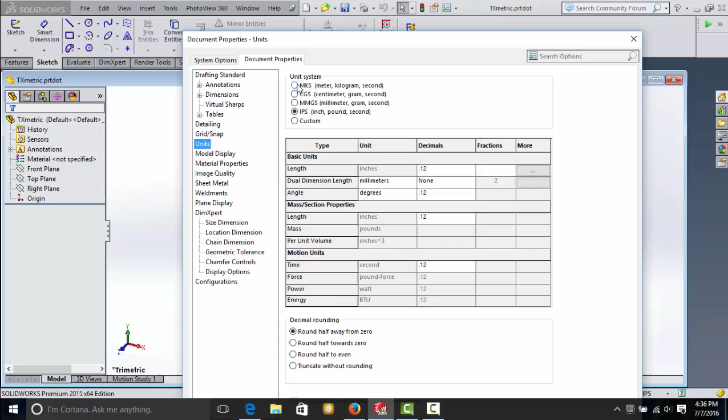Now what we want is a meter/kilogram/second unit system. Go ahead, click that, and hit OK. This metric part template can be used if you want to create metric parts. We're primarily going to be working with English units, so you won't have to use it much.

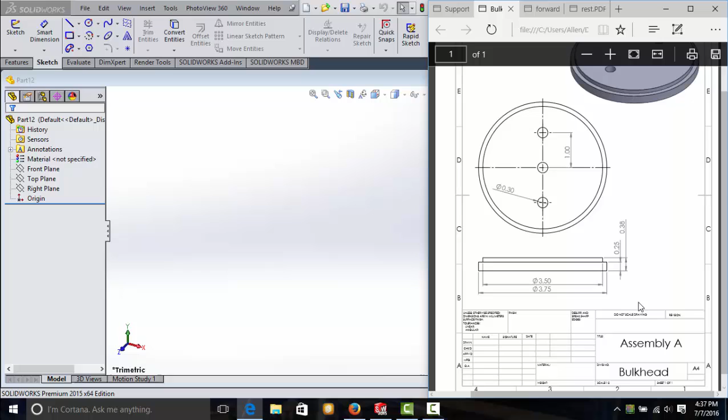Now let's go ahead and open up a new part. To create this part, you're going to be working from a drawing. We'll learn how to create drawings later, but for right now we're just going to be looking at this one. For this bulkhead, part of Assembly A, you can see the different views of the model and look at the dimensions we need to create. Go ahead and open up that part drawing so you can work from it on your end.

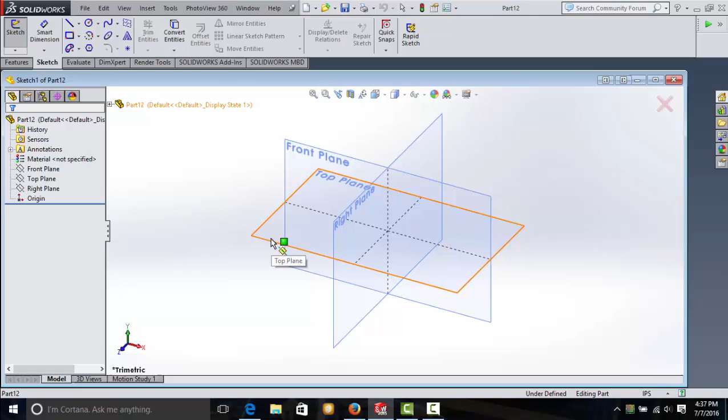First, I'm going to go to the Sketch tab here and select Circle. I'm going to be working from the top plane. Draw the circle, and then use our handy Smart Dimension tool to give it the proper dimension, which in this case is 3.75 inches. There we go.

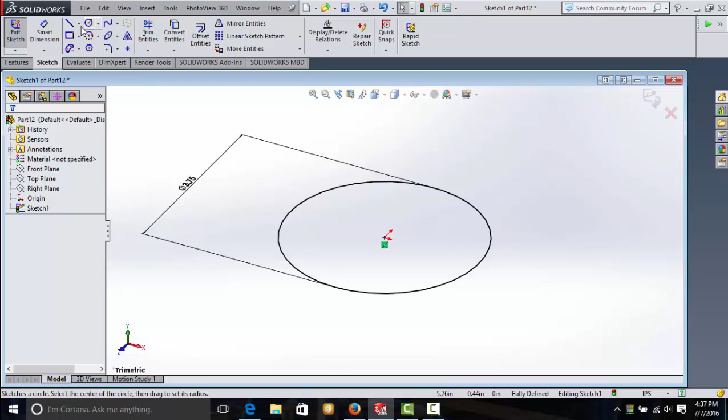Now I want to add a couple more things to this. We have 3 holes there. One of them is in the very center of the circle. That is 0.3 inches in diameter.

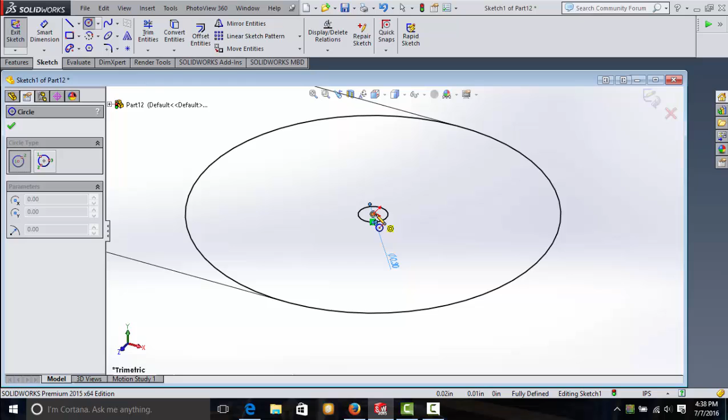Now there are 2 more holes in a direct line from that center. If you look carefully, you'll see that if you drag your circle pointer around, a dashed line appears to show you that you are directly horizontal on the same line as that original circle. If you go up here vertically, another one pops up. This is an important reference tool that can be very handy when it comes to drawing new sketches.

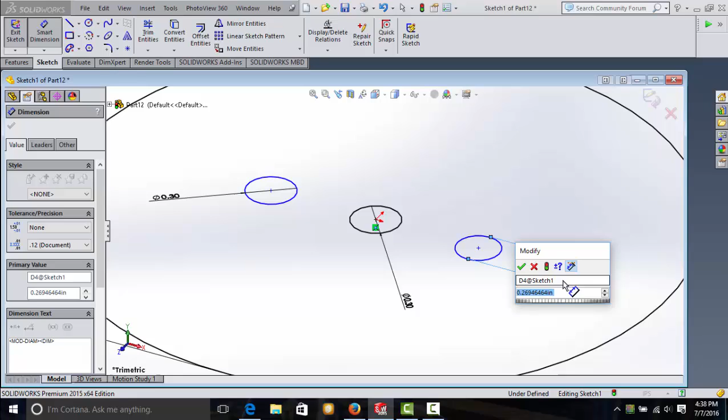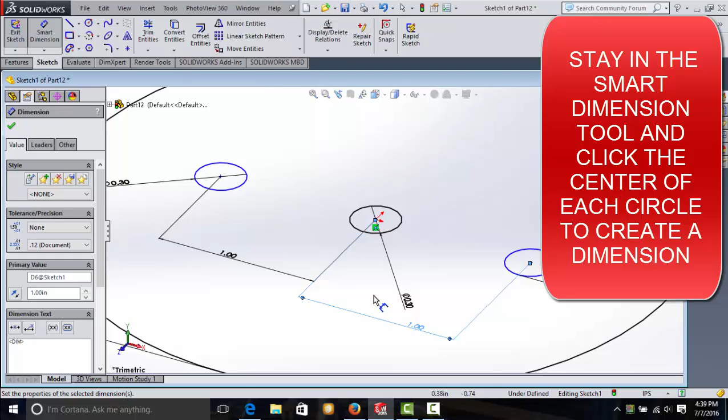Let's go ahead and put our circle, and another one over here. I'm going to dimension these. Now they're all 0.3 inches in diameter. Now to place them, looking at the drawing, we see they should be 1 inch apart. 1 inch. There it is. And 1 inch. There we go.

Now if you look at the circles, they are blue. They are blue because they are not fully constrained. If you see the green square here on this circle, it shows that this circle is coincident, or stuck, to the center origin plane. Bring up the model tree, the origin is right there.

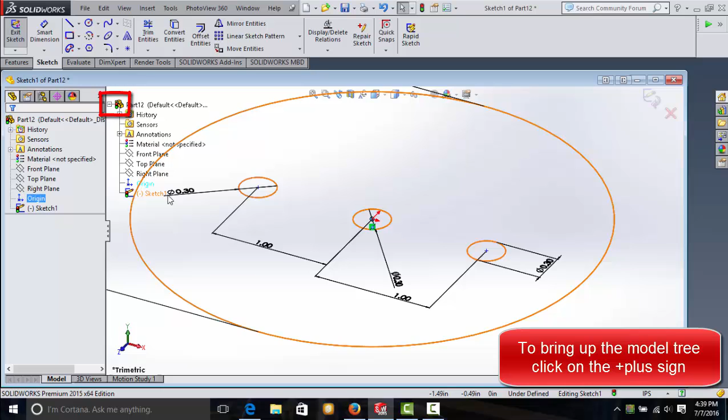These other 2 circles are not fully constrained. So if I click it and drag it around, it can move somewhere. See, it's moving on this circle. It doesn't have a specific place.

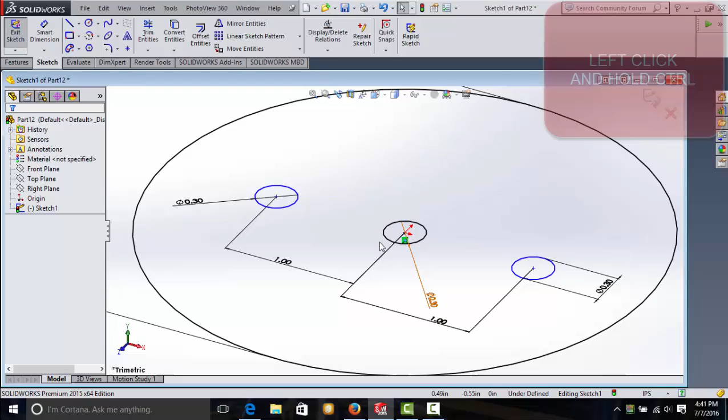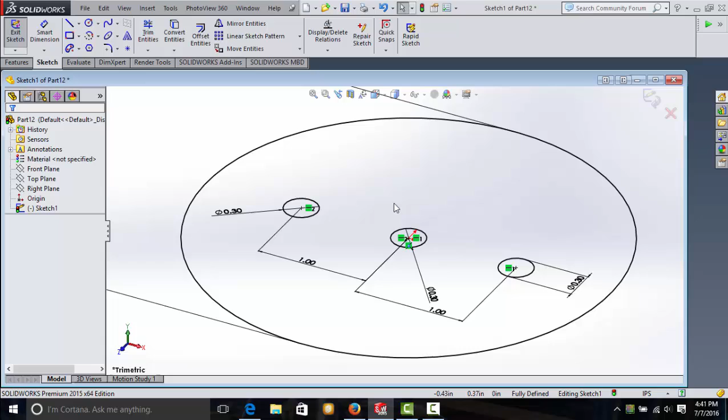To keep it from moving anywhere, I'm going to go ahead and select the center of these 2 circles, and I'll throw that one in too. If you look over here, there are several relations or constraints. One of them is horizontal. I'm going to click that, and now all 3 of them are lined up on the same line. They have turned from blue to black, meaning they cannot move at all.

This is just an introduction to constraints. I'm going to go and click here to exit the sketch, and we are going to save this as bulkhead.